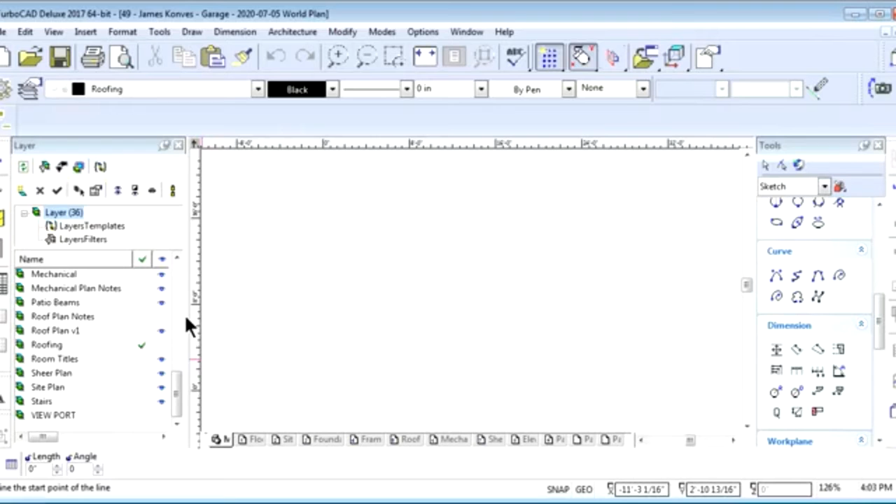Let's hide the mechanical stuff with our eyeball icon, since we don't need to see that. Notice some of these lines didn't go away, so we need to highlight those and move them to the mechanical layer. Get that straight... there we go. Now it's good. They're probably in a different layer by accident. So this is all we need.

What we're going to do now is this particular garage is going to have 1x6 shiplap siding. So the builder of this is going to use wooden siding, and when you do that, you have to put down something to put the siding against. So in this case, we're just going to shear the whole building.

In order to do that, I use the rectangle tool, and inside the rectangle tool I go to the brush and fill it black. So now I'm going to put little black rectangles along the edges of the building just to show where the shear panels are.

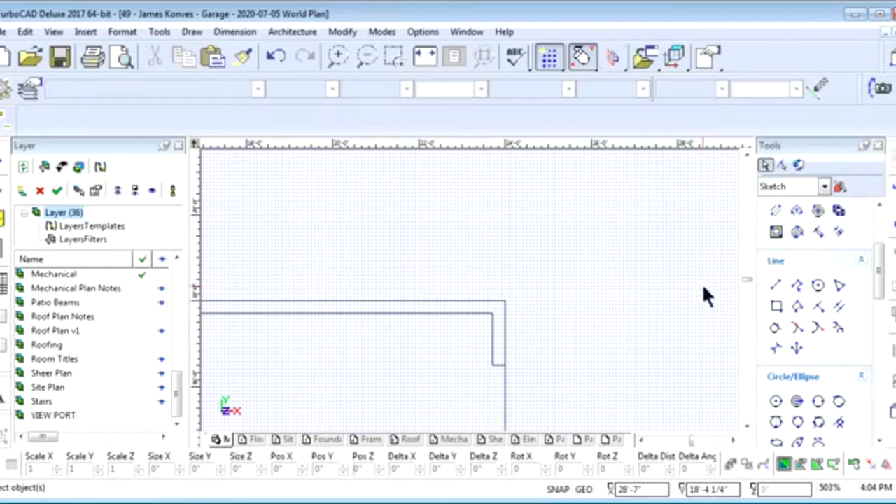So we're going to press the V key to get the vertex of this wall right here. Oh wait, I got my select tool on - that's kind of neat. Alright, let's click on that rectangle. Earlier I right-clicked on it to get to the properties and made it black, and now I left-click on it to activate the tool. I often forget to do that step.

Notice how it's not appearing - that's because we're on the roofing layer and it's not showing up. So we've got to scroll up or just move our checkbox to the Sheer Plan, and now our rectangle is showing up. Alright, we're going to scoot over some.

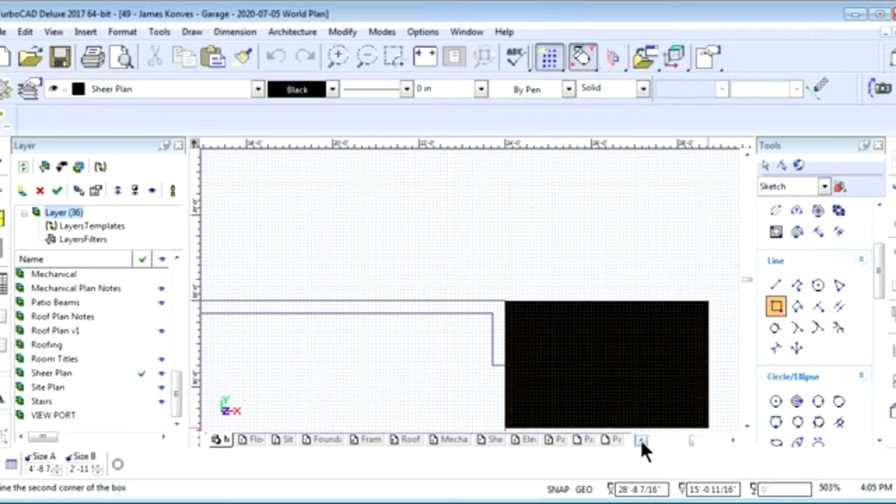I'm just going to come all the way across here. Now sometimes I stop at doorways and windows, but because the panel actually goes around the window, we're just going to go all the way across.

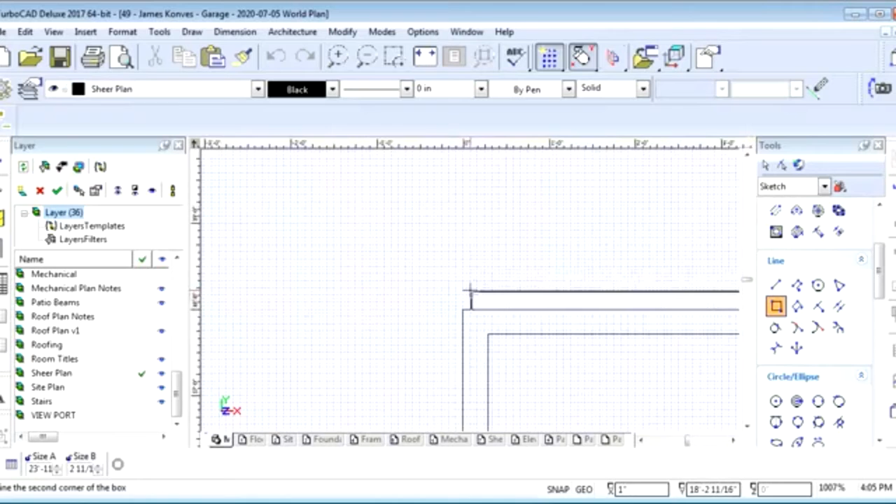I like to make it 1, 1.5, or 2 inches, that way it's visible from a distance. If it's too small, you can't really see it. So I'm going to go 1.5 inches. Now I can tab through the size to make sure I get the right size - it should be 24 feet and 1.5 inches. Press enter, then it locks it in.

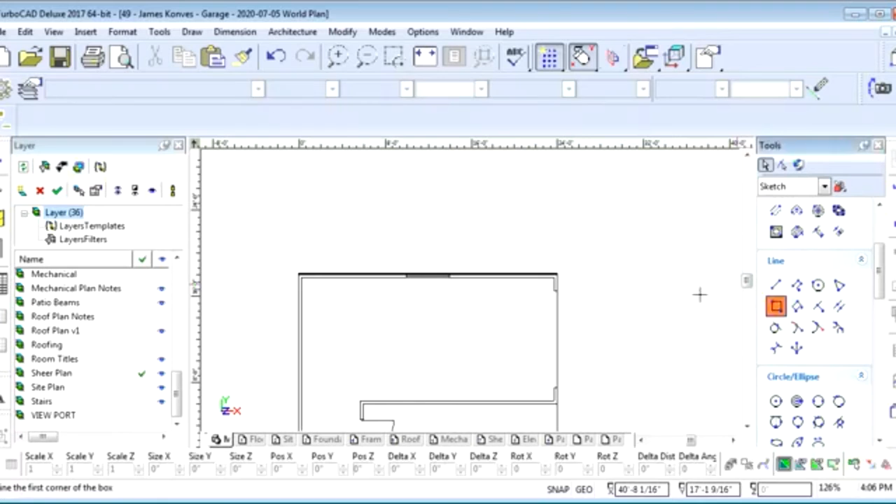So there's the first set of shear panels, and what they'll do is take 4x8 sheets and line them on up. Alright, and we're going to put another one over here on this wall, and down here.

Here we go. Now one thing I didn't do on the mechanical plan, I'll have to do later, just as a side note for you.

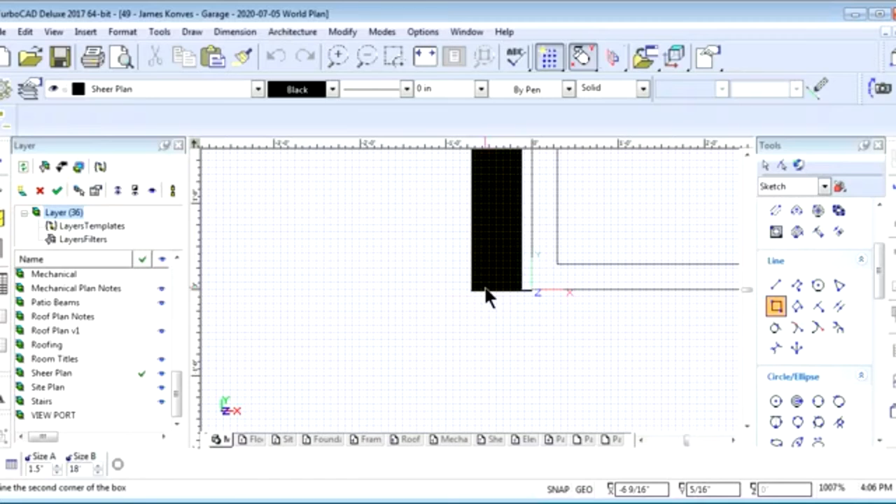Now with this one, because it's a rectangle, going up and down, I need to change which one is the big one and which one is the small one. So in this case, size A versus size B.

No, so what I was saying about the mechanical plan is I didn't put in the service, the site of service. So that's where the electrical panel is going to be, stuff like that.

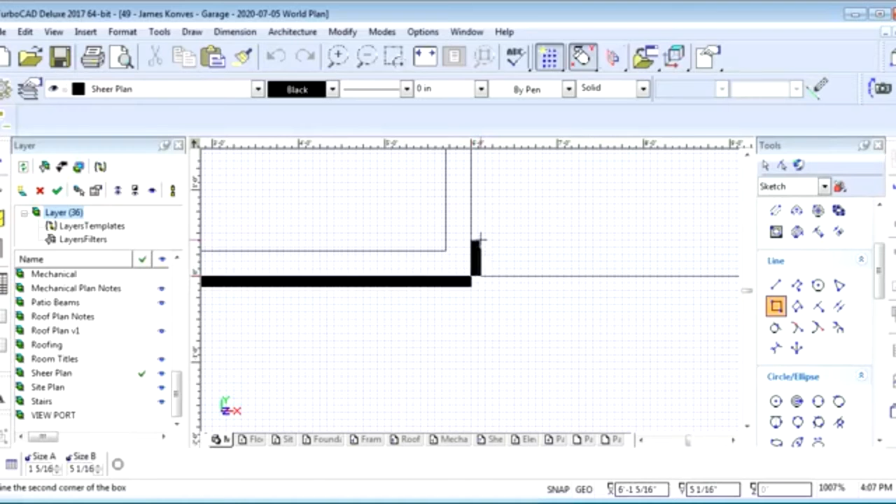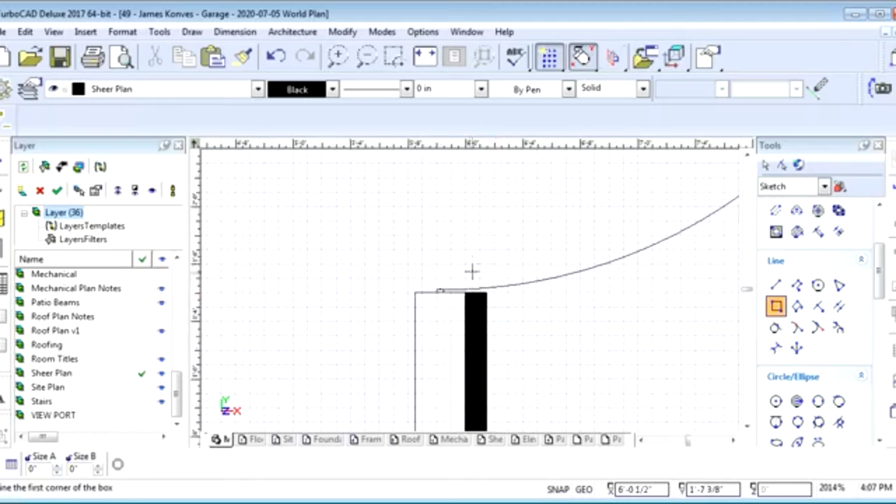1.5 inches, there we go. And again on this wall. Now with this doorway, I'm going to go around the door, so we'll just come up here. It's 1 foot 6 inches, that's right. And then down here. All right, let's see. 1.5, 1 foot 6 inches.

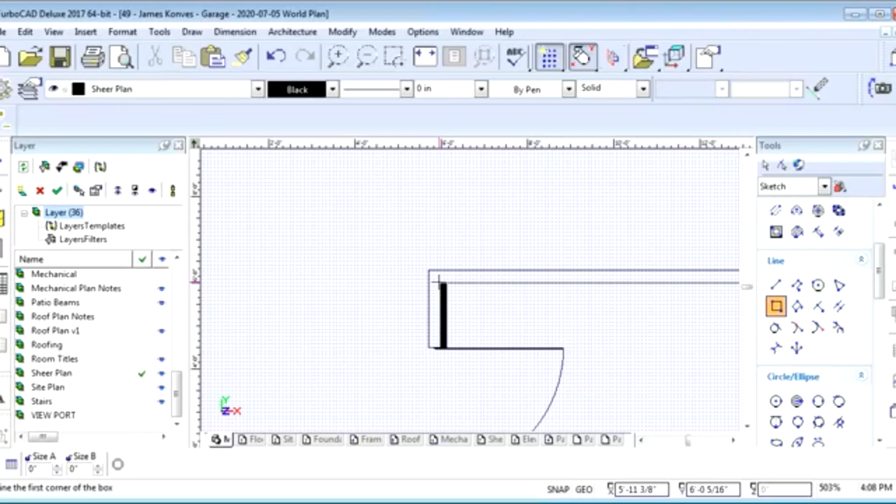Now with the shear panels, the way this works is they have certain structures. Now if your structure is bigger than 60 feet by 60 feet, then you have to put a shear panel in the middle of the structure to help make it stronger as well. That should be 18 feet right there. Yeah, it was. Good guess. But since this garage is really small, I didn't have to do that.

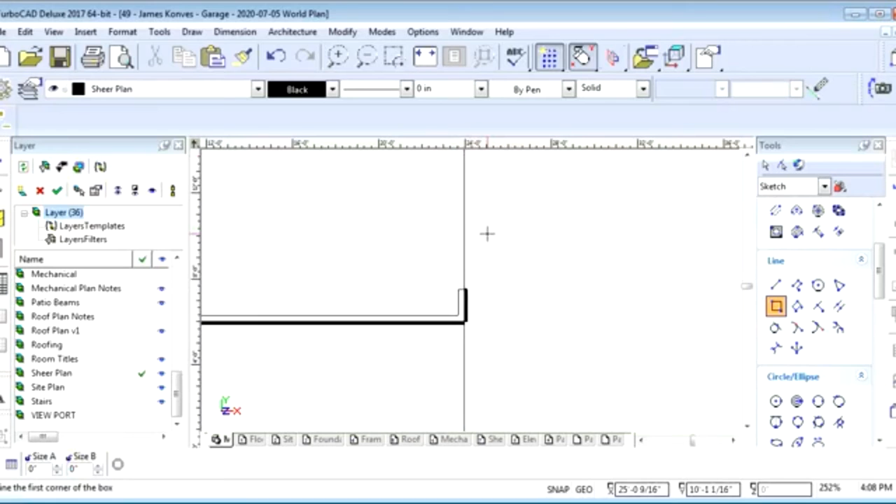And again, all right, so this shear plan is always pretty simple, especially since most of the time contractors around here just shear the whole thing. There we go. And especially in this case, it's easy to shear the whole thing because of the siding. All right, so that's all there is to it for the shear plan.

Now there will be a detail, a couple details that will need to go with this. For example, I'm going to have to show the structure of the wall, the shear panel, and the siding all on one detail. Let's see, maybe I have something like that already. Let's take a look.

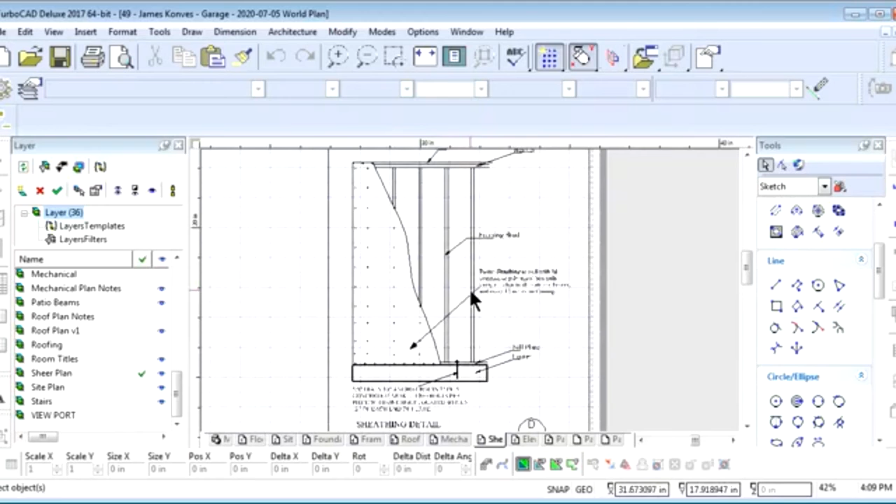Yeah, so this is the detail I was talking about, but what I'm going to do is add the siding on here too. And then there's rules for how to nail it all in here. Nail the panels in. Talks about how far away and all that. So we'll cover that later.

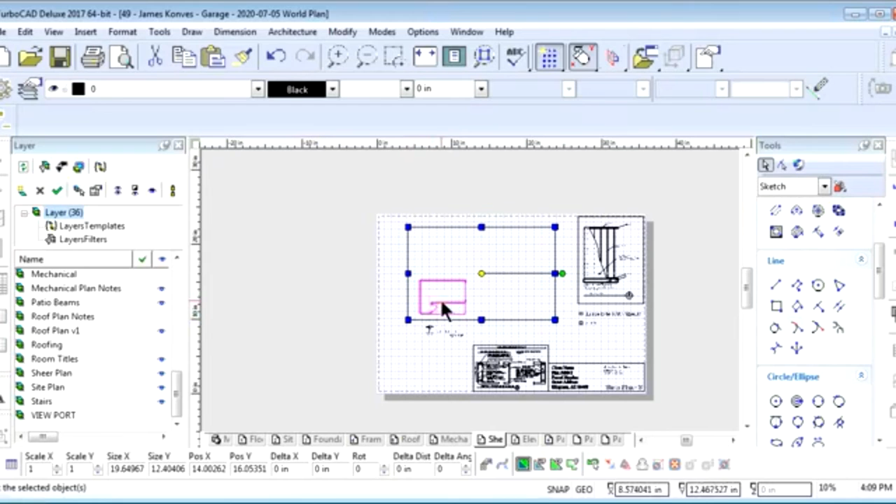Oh, I should make this bigger. What size was I making this thing? Okay, so again, as a reminder, this is the paper space. This here is a picture of the model space, which was what we built, we drew the house in, or in this case, the garage. And in here, we can tell the viewport to change the size or the scaling.

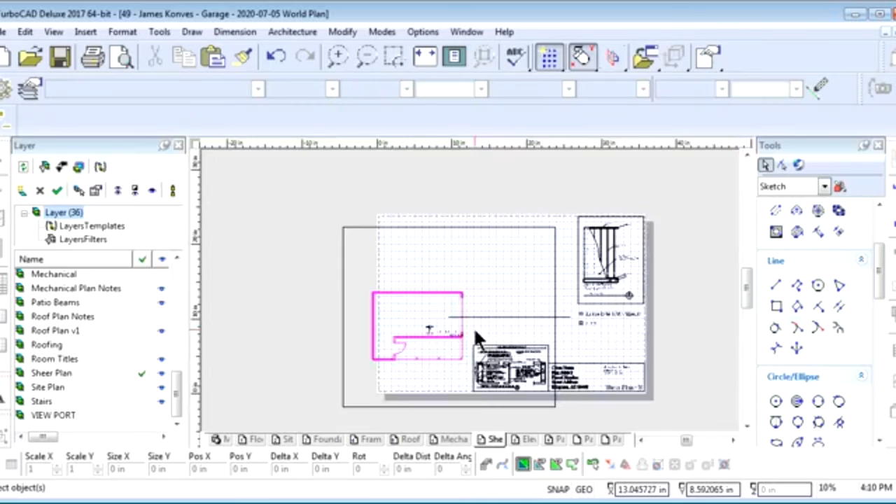So in this case, we're going to change it from 1/4 to 1/2. Bring this up in here. There we go. Now it takes up the page. Makes more sense. And we'll probably put some dimension lines in there. Why don't we do that? Let's go do that right now.

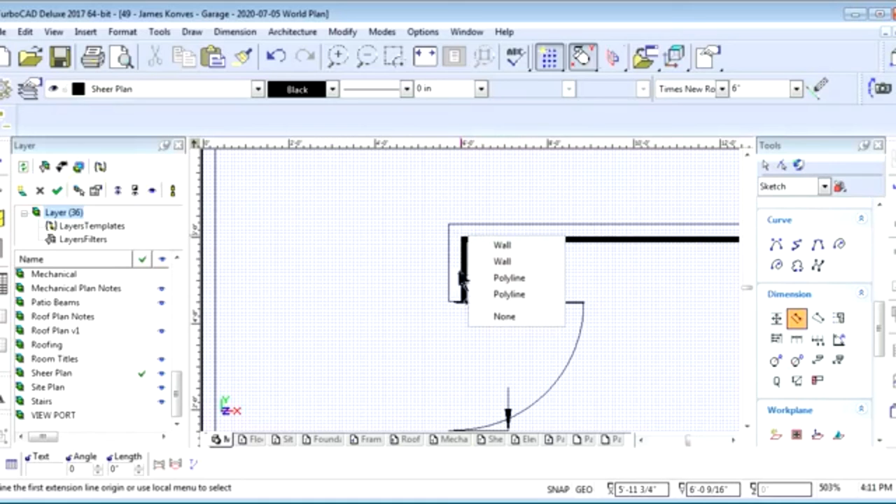All right, dimension lines. Okay. Now the dimensions, we got to make sure we're on the shear plan also, because it was on the roofing. So we did most recently. And again, we press the V button on the keyboard, and it'll help snap this stuff together real fast. Now with this one, we need to get in the corner, so we got to go make sure we get that wall. Okay, don't complain. There we go.

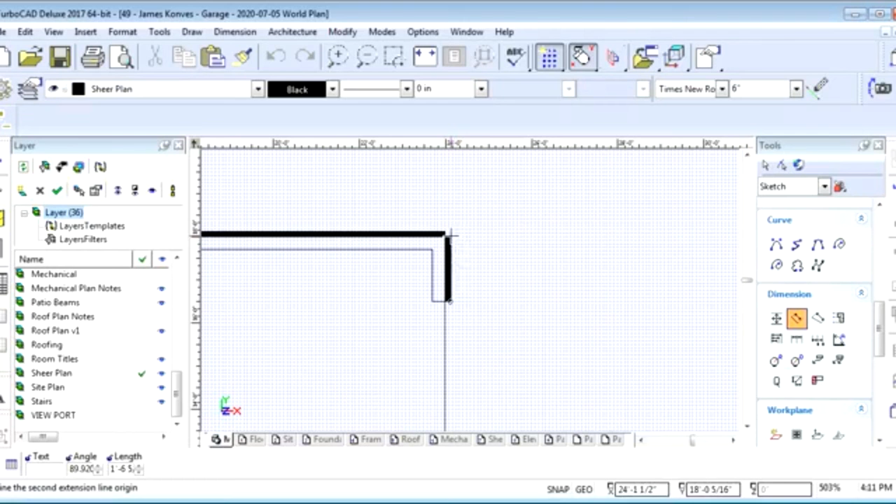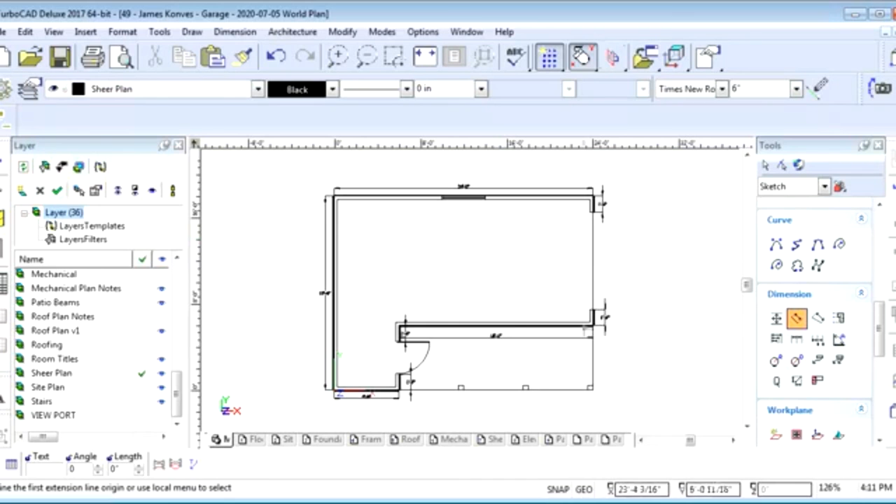So as a part of that, I'm providing these free videos to show you how to do the drafting portion. All right, so that would be the end of the shear plan. Nice and simple. It gets a little more complicated in larger structures, but for small garages like this, it's pretty straightforward. Okay, well, I hope you got a little bit of value out of this, and I hope to see you again on the next video.